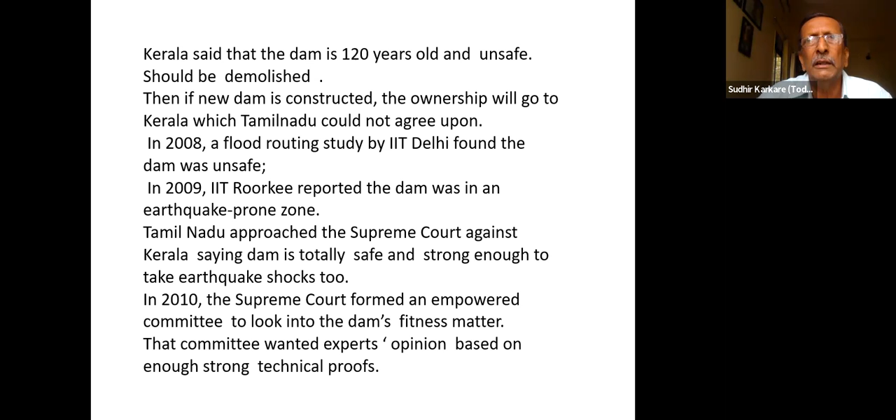So we know that Kerala and Tamil Nadu being in this particular fix, over whether the dam should be there or not, the court came in between, and said some experts' opinion should be there, because the court has to go with some reporting. Now 120 years have already gone - that means at that time it was almost 110 years. Which report is available? So the only answer was a technically perfect opinion supported by engineering data.

This is based on the record of various instruments normally installed in dams, and you get information over a period of 10, 20, 30, 40 years. The problem here was different - the dam was built in 1896.

It's not even construction of concrete, not even totally mason. It is an earthen dam. I'll come to that point because it's important and interesting, why that dam is like this. Since the dam was there for the last 120 years, people were saying nothing has happened in the last 100 years, so another 100 years and nothing will happen. But there is no technical confirmation or engineering support saying this is safe, go ahead.

So the court was in picture. Some authority in Delhi said this is a third-party decision required because we don't want any government agency involved, since there is political pressure. CWPRS was made the nodal agency, but they were also a government agency. They found someone else had to do it, and luckily we were known to a certain extent because we carried out a lot of experiments in the Koyna Dam, and we were asked whether we could do something over there.

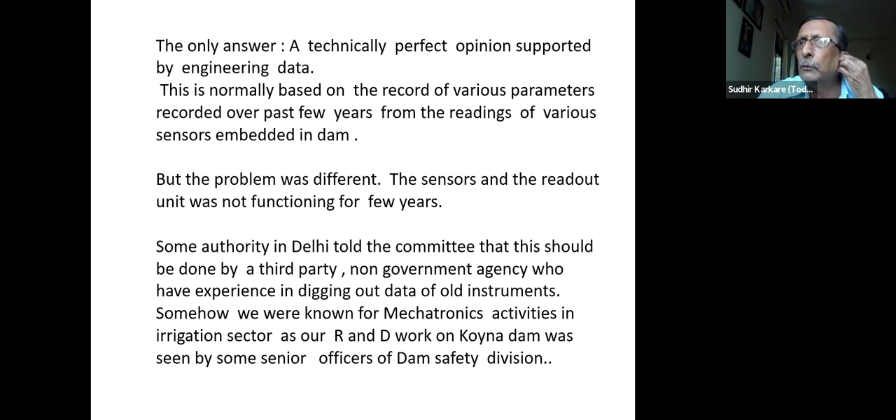Now let me tell you, we are too small to handle such projects, let me be very transparent. We were doing some experiments because of that idea, that let us try this thing. Koyna was near Pune, 120 kilometers away. They gave me the opportunity to carry out experiments there, collect data, etc. So I took advantage of that, and my people and I worked on that dam for so many years, minimum 10 years, trying different sensors, mechanisms, and whatnot.

Let me tell you one thing: Koyna Dam is so nicely maintained. Unlike any other government agency, the agency looking after that dam is so methodical. They have the last 40, 50, 100 years of records, written up and now on computer. They have excellently maintained their machinery, everything is kept in proper condition. Secondly, the people know what they are doing. They have not transferred people for 25 years. Believe me, government people usually get transferred in 3 years, but the people connected to instrumentation at Koyna Dam are not transferred for 20, 30 years, because they know the dam very well and should not be disturbed. It's a very critical position and no one should take any chance with it.

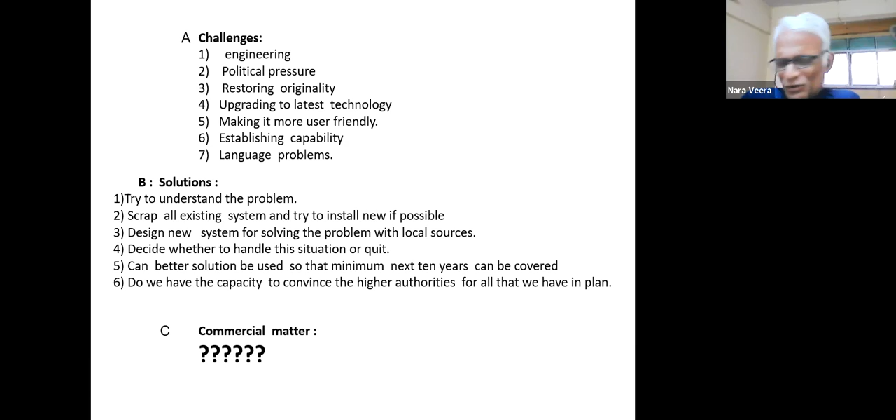What is happening is we worked on so many dams in the last 14, 15 years in different states in India. It is a lethargy of people because they don't want to touch that equipment. It is really actually difficult to handle. They don't know how to, like right now I'm suffering because this laptop is new, I don't know which key is where. So like that, the people on the front don't know how to take the reading, where to write it down, what the meaning of that reading is, how to keep that record, how to put it to government, all those things.

So it should be very user friendly. Right now we are using this word user friendly because we are tuned to that. Otherwise, this word was not there about 20 years back.

Establishing capability. While doing so, there were so many people who used to monitor us, who should monitor us rather. And we should not say something which is hanky-panky or untechnical, so that we ourselves will be questioned by the agency, who told you to handle this thing, you don't know anything. So capability handling or capability establishing was a big challenge for us.

And the last one is the language problem. We were going to be over there for some period, talking to the engineers over there or whoever is there. Unfortunately those people don't speak Hindi. English is okay, but the language problem was definitely there, which we jotted down. This is the problem we were going to face.

Now what is the solution? Trying to understand the problem, that's the first. Scrap all existing, whatever is there, because unless this is done, it's like taking a patient to a hospital from the first dispensary. The first dispensary, first doctor has given something, patient is not okay. So the next doctor says forget what he has done, let me check newly. So like that, scrap all the existing system and try to install new where we believe it is okay, because that was the experience we had.

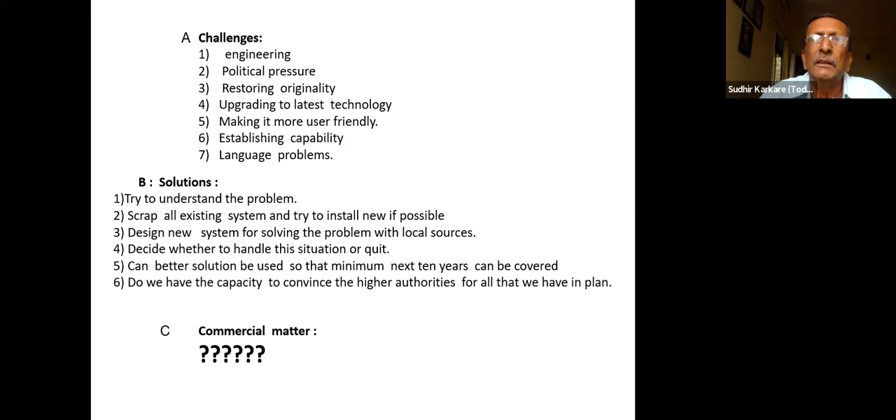Then suppose everything is done, I am convinced that my machine is okay and everything is there. Whether I can convince the higher authority, because they are going to sign my final report, saying that this is okay or not. So it was a big thing, but we took that challenge.

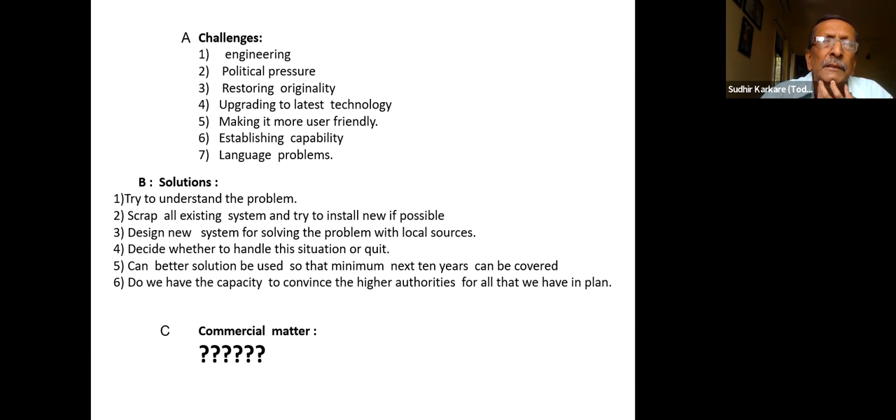And the last was a commercial matter. New dam construction costs about 2,000 crores, plus the time of about 12 years. Now, how to charge this? It was a big thing, so let it remain as a question.

With the knowledge gathered from various dams, as I mentioned, following fundamental physics and principles of electrical engineering, we decided to find out the health of embedded sensors. Now what is an embedded sensor? When the dam is being constructed, it goes on for 10, 12 years. So layer-wise, some instruments are introduced inside, which are embedded. They are actually inside the concrete, and the connections are given by some special cables, which run in kilometers. They are laid down, and over and above, new construction comes in.

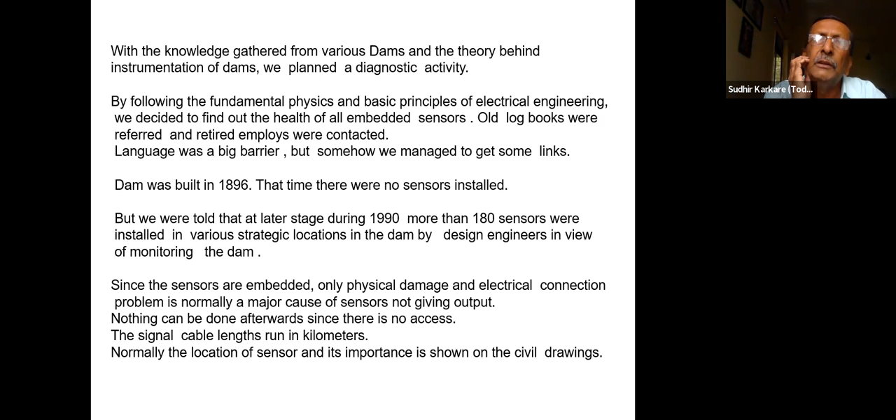And in such cases, a lot of R&D has happened world over, because this is not only a problem of India, it happens everywhere in the world. But that was not our subject, and we said okay, rehabilitation of the dam can be done some other way. We can drill new holes, we can put new types of sensors, we can work on the surfaces, whatnot. So many other things were done.

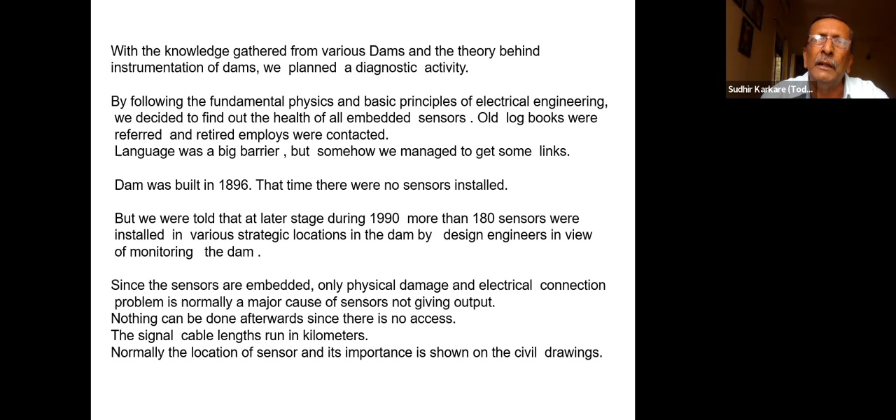But instead of using all those things, since it was a very old earthen dam, we said okay, let us try with basic physics, electrical engineering, geology and irrigation. What is being used has been there for the last 120 years, so believe in that. So we worked on that, and more than 180 sensors were introduced by the earlier government in 1990. That was the time when this tussle, with this subject came in, about who is to own the dam.

So somebody said that the engineering division should introduce some sensors to at least get some information, so that we know whether the dam is okay or not. It's possible engineering - like, every time I need not go for an ECG, I can check with a stethoscope, or I can check BP. So if ECG is not possible, at least have a BP machine at home.

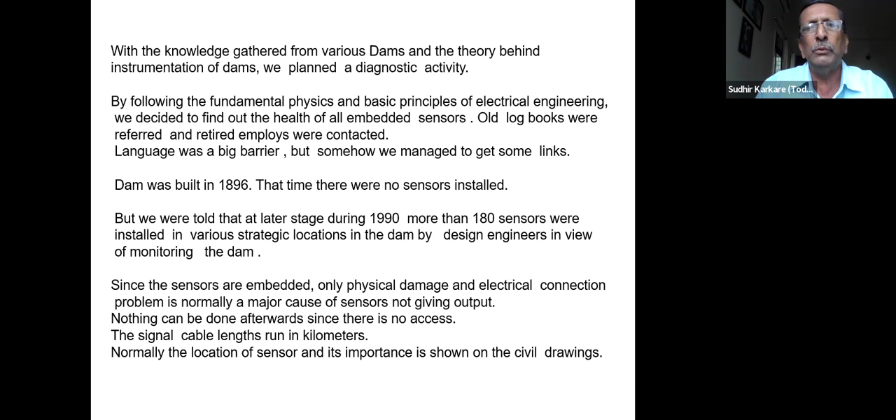So they decided to introduce 180 sensors newly, after 100 years. Let us start collecting data. If there is something erratic, at least we will know whether the dam is safe, unsafe, or something else is required. Now we have to understand the limitations of the engineering, and still we have to say something needs to be done.

Here I have mentioned that basic problems of cable connections and failed electronics are seen. But believe me, from my last 20 or 30 years experience as a mechanical engineer, electronics mainly fail because of poor mechanical work. This is my understanding.

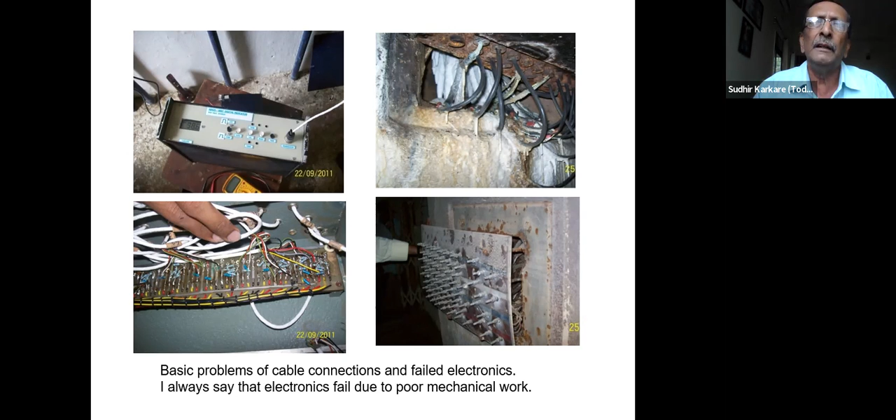And that poor mechanical work is like fixing PCBs with a lot of tension, improper screws, improper mechanical assembly for holding devices. Heat sinks having their weight on the component, dangling, and so many other things - gravity is not considered. Lot many things are there. So I always say electronics is good, but mechanically they fail. That's where we tried to do a lot of things.

As I mentioned, based on some old reports of the management, using oscilloscope, frequency generator, and our own machines, we made something. Our experience at Koyna Dam was very useful because there we had total open access, and all those experiments came to use - we tried to find out if something is live, let's go and do it. After seeing all the earlier work, we had to undo that whole work because it was not useful. So we did something new and got some results.

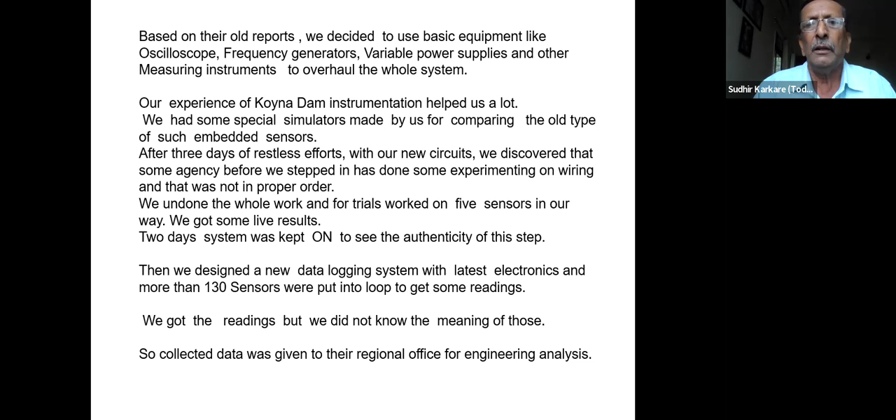For 2 days we kept the system on, just to see whether what we had done had any meaning, because erratic results can crop in. So for 2 days we kept quiet, just watching, and did a lot of thinking and paperwork. Then we said, why not make an entirely new system and work on the paperwork. So we used that time - we got the readings, but we didn't know what was the meaning of that.

If that is happening to a huge mass, and it is coming back, that means something needs to be monitored mechanically. Those mechanical sensors are inside, based on variable frequency type devices, strain gauges, or many other types like load cells, which people used to adopt.

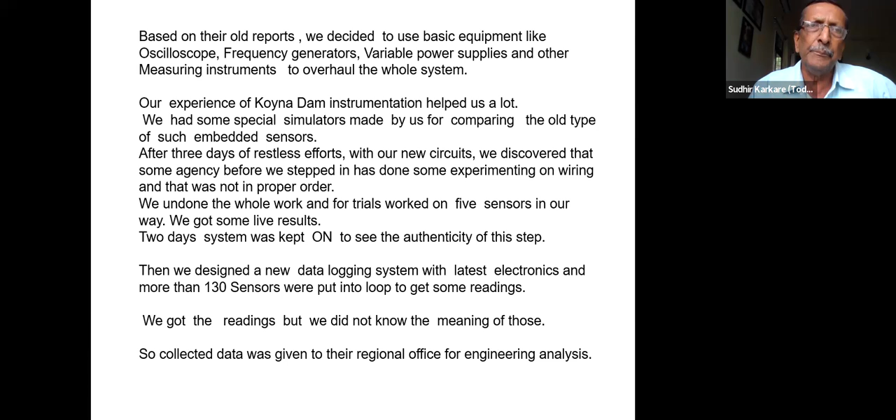Later on, these came to us in India during Jawaharlal Nehru's period through Japan. Japan gave us a lot of international help. CWPRS Pune got a lot of help from Japanese people through the connection with Pandit Nehru, and so many Japanese equipment was introduced in our earlier dams. Now those companies are not even in existence in Japan, but we still have those instruments with us.

As I said, we got some readings and some data was available with us. This is how the new system was later developed. You have seen the difference between what was there earlier and what is being done by us now. This is the advantage of going into latest technologies and materials, and more acquaintance, because now people know how to handle computers, PCBs, power supplies, etc.

So this is what was done there, and we provided the data logger, which we developed in Pune and shifted over there as and when required. Luckily, some relations were established, and using the principles of geological engineering, we were told that some readings are useful. This is something where you can always get a feel that your patient is coming out of coma.

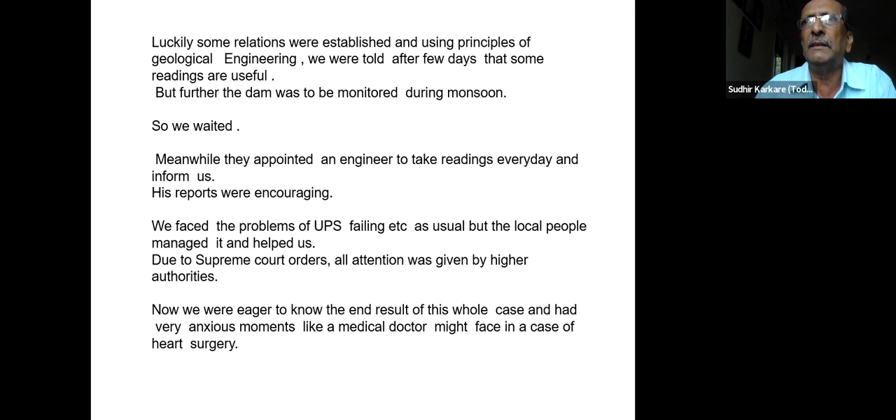Meanwhile, they appointed an engineer to take readings every day, since that was our requirement. Monitoring from Pune was not possible, and language was another barrier. We faced problems like UPS and other things because, as I showed in the photographs, the whole area is jungle. The dam doesn't have any electrical power. Even their own power they cannot use as a policy. They have their own systems with small generators, and for our system we use UPS.

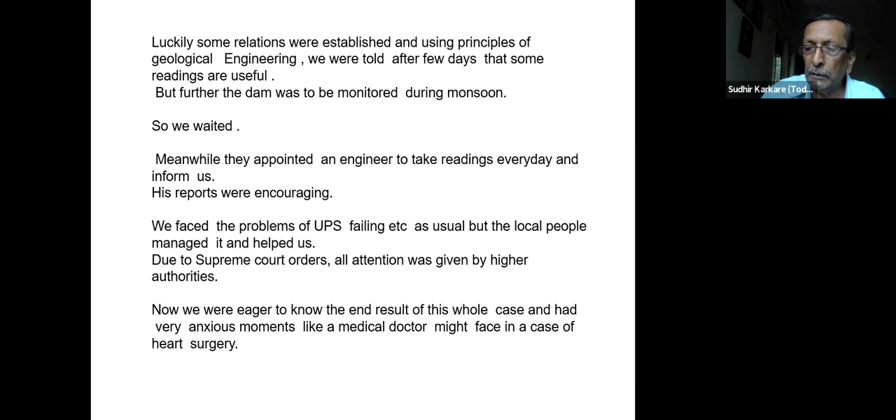Due to Supreme Court orders, all attention was given because it was definitely a very important matter for them. We were eager to know what was happening, as we were waiting for one monsoon. After about 6 months, the Supreme Court was told by the expert committee that the dam is safe.

This was the winning stroke in our project. What we did came to the limelight, reaching the level of the Supreme Court, where they could believe it, and they put a remark that nothing is wrong with the dam, sufficient data is available, and the dam need not be demolished.

You can imagine, even right now as I am speaking this, I am going through that whole cycle. It was such a big win, not just like winning a cricket match, but a big dimensional win. And again, I'm saying this is not entirely due to my input alone. So many people who were with me throughout the project helped me out.

And Koyna, of course, they were highly useful, along with CWPRS. I always say this is the strength of engineering. This was a totally unbiased experience. Nobody tried it - for 100 years, nobody had touched it. We did something, even though we don't know the subject fully. We went into it through analytical methods, did something, and got results which were accepted by the technical authorities.

What else is required? So a dam from 1896, the dream project of Colonel Pennycuick - I'm coming back to this slide because it's very important to know about this person. Colonel Pennycuick was the civil engineer of the British era, John Pennycuick, who built that dam. This dam was saved from demolition, and more than that, this national property got a new life. Very few people in our profession get such a chance to deliver something in the interest of the nation.

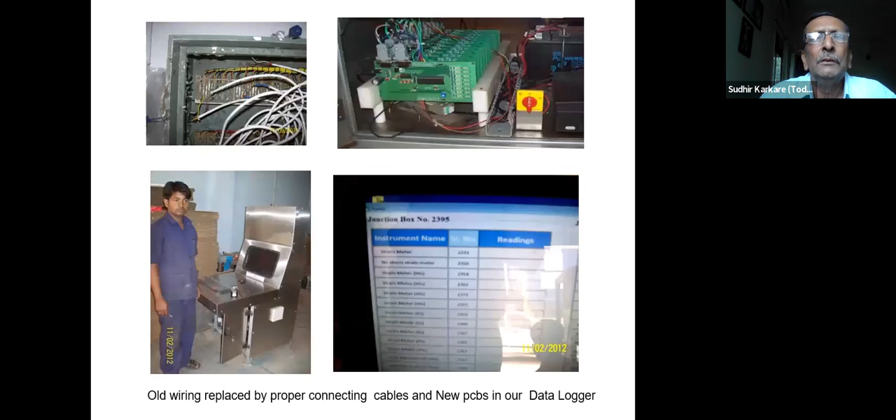I shall pass through this world but once. If therefore there be any kindness I can show, or any good thing I can do, let me do it now. Let me not defer it, nor neglect it, for I shall not pass this way again.

So let me tell you something over here. This John Pennycuick was a colonel, civil engineer, and he was looking after irrigation. At that time, in the British era, it was not Kerala and Tamil Nadu, it was the Travancore Cochin province. So it all came under Victoria, Queen Victoria, and all these people were working as government officers.

He was taking care of the Kerala side and that kind of area. He came across so many temples and sadhus and other people, and he fell in love with Indian culture. He started living among and understanding the Adivasis.

Now, if you see, the Periyar is very difficult to reach even today. Imagine 100 years back, 120 years back, there were no roads, it was all full of jungles. How could he find out this place, that it is a place where a water dam can be made, which will take care of so many thousands and millions of liters, which can help the Indians? I am saying that he thought of Indians.

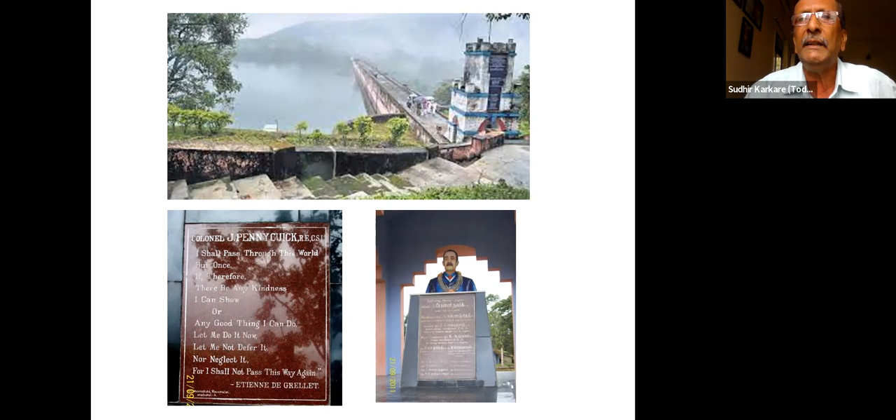Why did he do so? And having done so, he handed it over to the people of India, like Kerala and Tamil Nadu. Understanding this, can we think that somebody who has done this should have it demolished for only political reason or for finance? Now we know what has happened in irrigation departments in Maharashtra and elsewhere. We know today's conditions of our dams and all the economics behind it.

Imagine this particular thing. When I understood this history, that day I said I need not charge anything to these people. That is why I put a question mark on the economics. I said this is an opportunity for us, because I am not going to come here again, but let us do it. And if it is working, let it be a national property saving, which I am supposed to do as an engineer. And we did it.

And now everything is put to you. This story is not known to many people. Only very few people know, because being a court matter and other things, very few people know about it. Now, the court matter is over, about 12 to 15 years now gone. Nothing is wrong, the dam is standing very stout over there, and people are happy.

And it is now protected further because engineering has been done properly, so they have more confidence and they are in touch with us. We keep on visiting, two or three times, I mean once every three years or so, and talk to some people who have not been transferred. But we are happy that we could do something to save this. That is why I always say we have saved a dream project of Colonel Pennycuick.

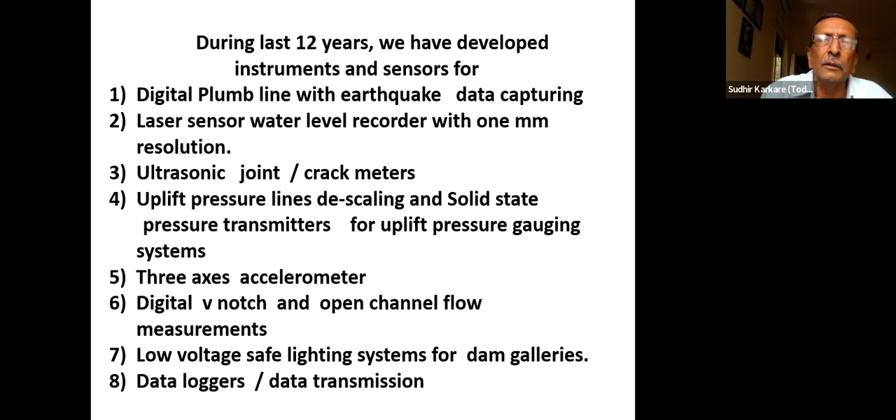These are the instruments: a 3-axis accelerometer for dam earthquake measurement - these are very sensitive devices. Digital V-notch and open channel flow measurement is also important. I'm taking advantage of this platform to say that we can measure water flow in cusecs - cusecs being the massive volume of water released through the dam's gate. At the same time, we have made systems to measure just 1 ml of water in 1 hour, which also needs to be uniformly measured. So we can measure both cusecs and tiny quantities - that is the span of what we do.

Low voltage safe lighting system - the dams have inside galleries called inspection galleries. Every day someone has to go there to check what is happening, a ritual to find out if any crack has developed, any water seepage, or anything wrong. Those galleries are totally dark since they are underground, so workers go with torches. Later I saw some tube lights fitted on the walls, but now all the walls are damp, with water on both sides, creating a lot of risk of electrical shock.

I have seen some accidents where people went inside and were not found for 15 days. The people at home thought they were on the job, but that person got an electrical shock inside and died, without anyone knowing he was in the tunnel or gallery.

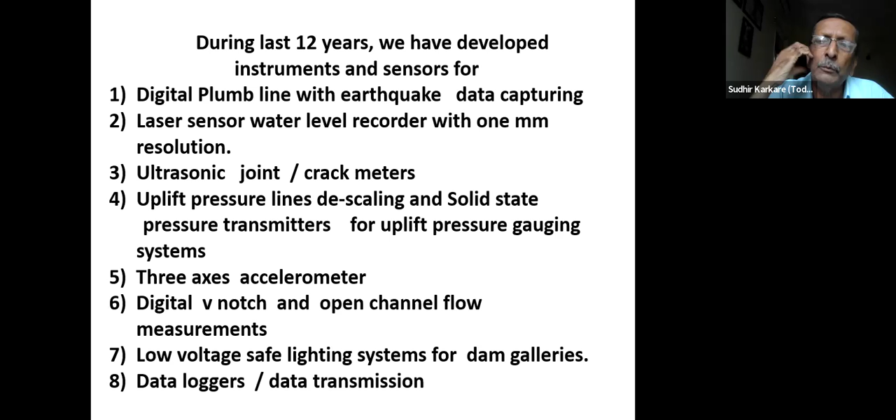So we decided to go with a low voltage safe lighting system so that workers would not need to carry a torch, because a torch doesn't give enough light. These lights were designed to work on batteries in case of power failure, along with data loggers and other equipment.

We are actually a very small company in this industry, but we are known for handling such odd jobs. We have done very selected and difficult jobs, because working on irrigation projects is very difficult for various reasons.